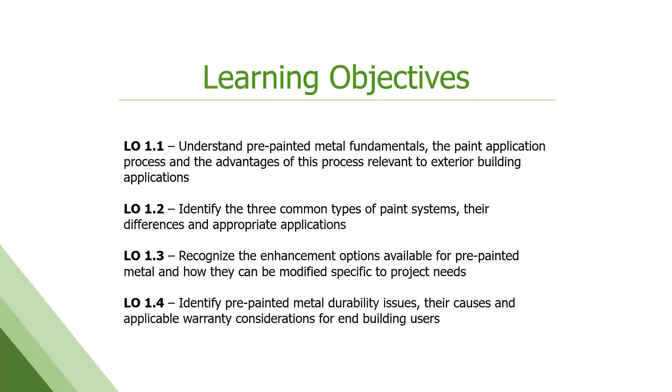So the 4 sections that we've broken this into are understanding pre-painted metal fundamentals and the paint application process. Then we're going to move into the 3 common types of paint that are used for building products. We'll talk about some enhancements and customization that can be done around specific project needs or environments. And then at the end, we'll wrap up with durability, performance, and warranty considerations for this type of product.

So what is pre-painted metal? It's just that. It's giant rolls of steel or aluminum, which have their paint applied in a factory setting, baked on and cured. And then they go on to be formed into panels, pieces, and parts after they've been painted. It's not all the same. There's a lot of considerations, which we're going to go through today.

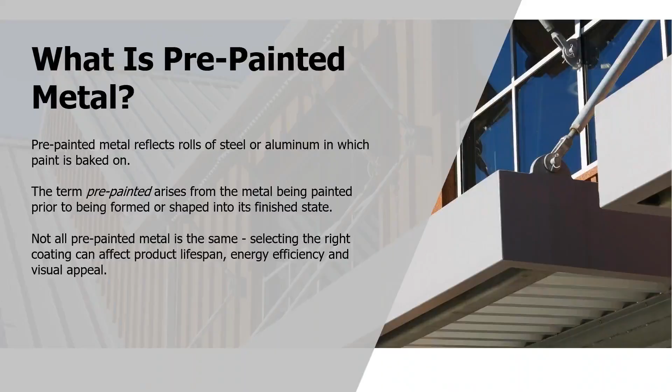So to start, a question for you all. How is paint applied to metal for the majority of building applications? There's really 4 types of paint application that most people know: air spraying, dipping, rolling, and brushing. And the answer is rolling. This is actually a picture of what coil coating or pre-painted metal coating looks like. This is not rollers like we use in our house to roll on house paint. Much larger scale, much faster, much more dynamic, but that is an example of what it looks like.

What we have here is an example of a very standard pre-painted metal line, or coil coating line as they're often referred to. This is from the National Coil Coating Association, the NCCA. It's a continuous process. We actually attach the end of one coil to the next and keep running in a continuous fashion. We clean the coil first. We then usually add a pretreatment and then a primer and then finally the top coat, or the paint that is seen on the finished building. A lot of different coatings are used: backers, primers, and top coats. We're going to get into those later on in more detail.

So the speeds of these lines are quite fast. Typically 100 feet per minute up to 700 feet per minute. I would say that the average coil line in the U.S. runs at about 300 to 500 feet per minute, so very quick.

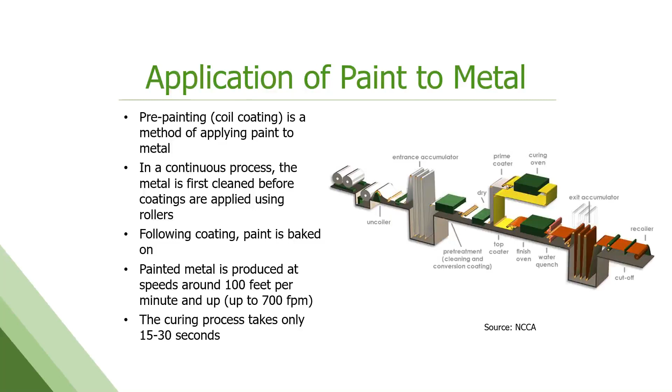So why do we do this? Why coil coating? Why pre-painted metal? There's several advantages to this. The cleaning and the prepping of the metal is very tightly controlled. You get a really good adhesion of the coating to the substrate. It's fast, it's economical, and we're getting very efficient use of the paint.

Typically, the total paint system, including backer and top side, is only about 1.4 mils thick. This is very, very thin compared to most industrial coatings, which are 2 to 5 mils in thickness. Cars are usually 5 to 8 mils in thickness in coating. As a comparison, your average copier paper is actually 2 to 3 times thicker than the paint that we're putting on these substrates.

Michelle? Yes? Michelle, could you move the microphone away from your mouth just a little bit? We're picking up a lot of background noise. That better? That's better. Thank you. Thank you. Sorry about that.

Now, since these coils of steel and aluminum are painted ahead of time, the paint is really important in that it has to be able to survive the fabrication process afterwards. So it's got to be hard, durable, but also very flexible. So there's a lot of science that goes into the paint and the paint formulations. I promise I won't make any of you do any chemistry today, so it's my guarantee to you. But we might use some chemical terms, but no chemistry.

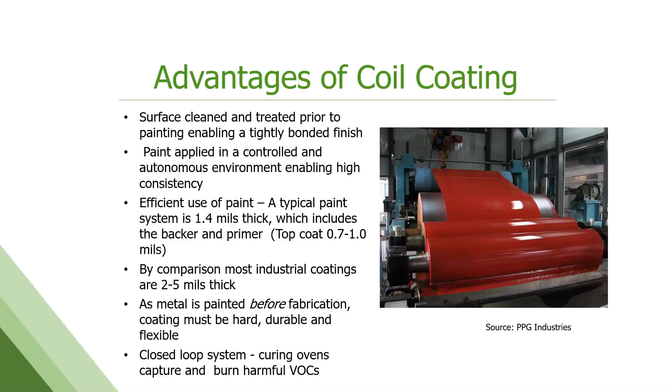Now, although this is a great process, there are a few limitations which warrant some discussion. So it's very rapid once going, very fast and continuous. So there's a lot of setup involved. There's a lot of moving parts, obviously very large equipment, and it's based on efficiencies of scale. So we like to run large orders at once, whole coils, which can restrict the color palette that most end fabricators offer. So doing short custom work is not ideal. It can be done, but it's not preferred.

So for instance, an average paint line holds from start to finish about 2,500 to 3,500 linear feet of metal at a time. So running smaller quantities than that becomes a bit of a challenge in this process.

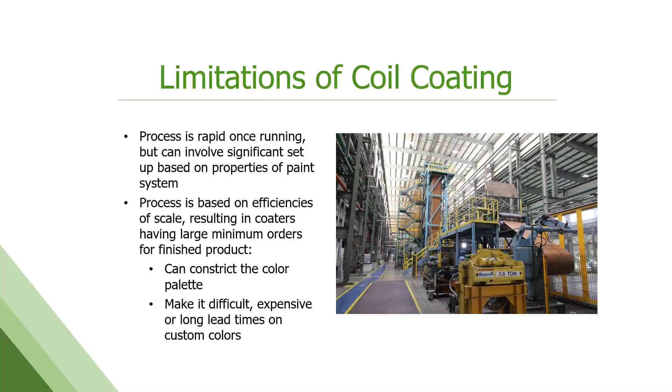Talk about the quality control a little bit. This process, because it is so tightly controlled and is so consistent from run to run and throughout a coil, the quality control is really important. And like we said, these coatings have to withstand a lot once they leave and go to get formed and then get installed on a building. So we run a lot of tests off the line, a T-bend test and a reverse impact test, which simulate forming and shaping of the final product. We want to make sure that the paint adheres like it's supposed to.

We test color consistency. It's very important in the final product, the aesthetics. We look at gloss and film thickness. Film thickness is critical not only for color control, but also warranty performance that we'll discuss later.

And there's some examples there. So failing impact test on the left and a passing on the right. We actually apply a piece of tape to that bump and pull it off quickly to see if the paint comes off or not.

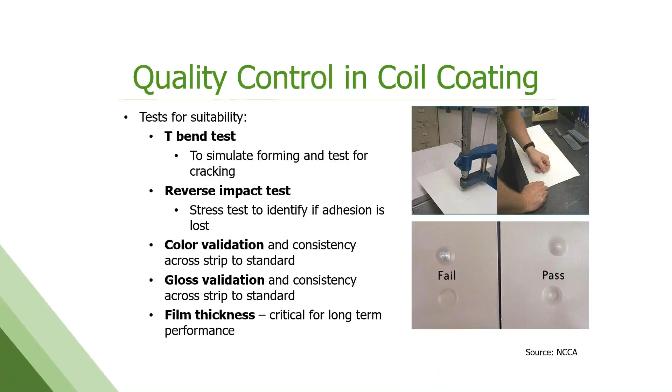While the focus today is going to be on paint, I do want to talk a little bit about the whole system here for reference. So here's a cross-section of what we've got. You've got base steel or aluminum, which is your substrate. If it's steel, there's almost always a metallic coating on top of that for corrosion protection. Then we put down the pre-treatment on both sides. That helps etch the surface and prepare it to take the paint. And then there's a primer that goes on both sides.

The primer does a couple things. It provides good adhesion for the top coat. It also contributes to corrosion protection and formability of the final product. And then, of course, we have the final top coat, which is usually the color coat, the part that's going to be seen in the final fabrication. You can apply clear coats and some other additional coats as well for protection and special appearances.

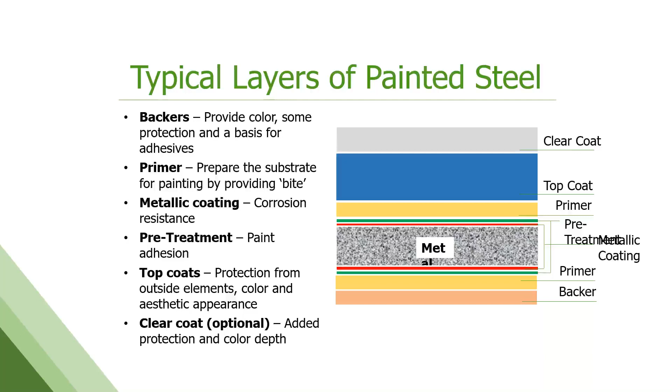So metallic coatings, I want to talk about real quick. There's whole courses just on this. It's a subject unto itself, but the two typical metallic coatings that we see in coated steel are galvanized and aluminum zinc. Galvanized is 100% zinc coating. It has to be added so that the steel doesn't rust. And then the aluminum zinc, 55% aluminum zinc, which is commonly known as Galvalume or Zincalume in the industry.

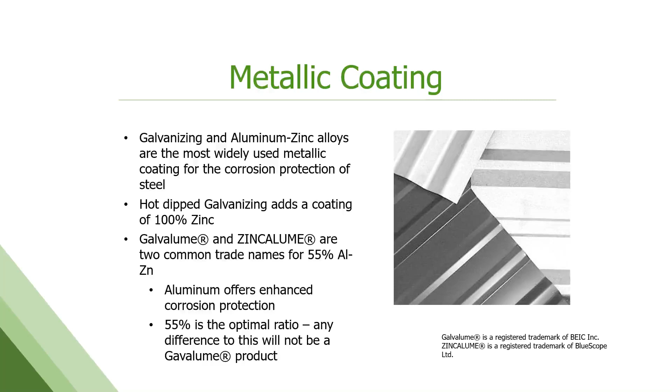The addition of aluminum provides really enhanced corrosion protection. 55% has been determined the optimal ratio for that. The aluminum is inert. The zinc is sacrificial. So the Galvalume product is a licensed product, as is the Zincalume product. If you're calling your product Galvalume or Zincalume, you have to have a license from an organization called the BIEC. Almost all license holders are providing 20 to 25-year corrosion warranties on the substrate for this product, so that separates it from galvanized and some other coated metals that are out there, and it has a warranty to back it up.

And one thing that's important to mention is that there's a lot of aluminum zinc substrate out there, but if it doesn't have the Galvalume name, it's not registered and it's not licensed and may not be warranted. Something to keep in mind.

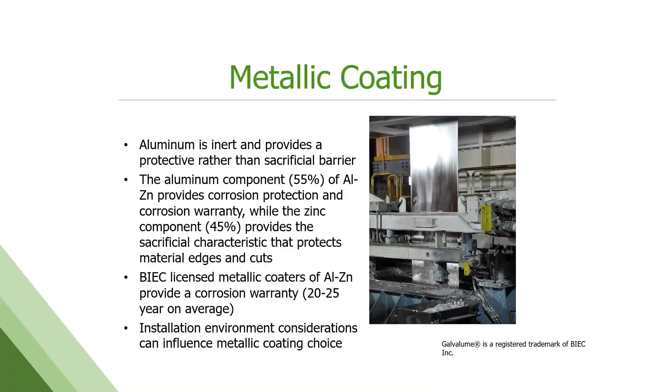So now on to paint, which is the focus of the rest of the time we have here. What is paint? Well, I think most of us have some familiarity with paint and have dealt with it in the past in some form, probably in our houses more than anywhere else. But it's a liquid designed for application to a surface in a thin film that then cures to a solid film. It usually does two things: it's either protecting the surface or creating some kind of desired look or aesthetic. And again, there's many different methods for doing this: brushing, dipping, spraying, vacuum coating, and roll coating.

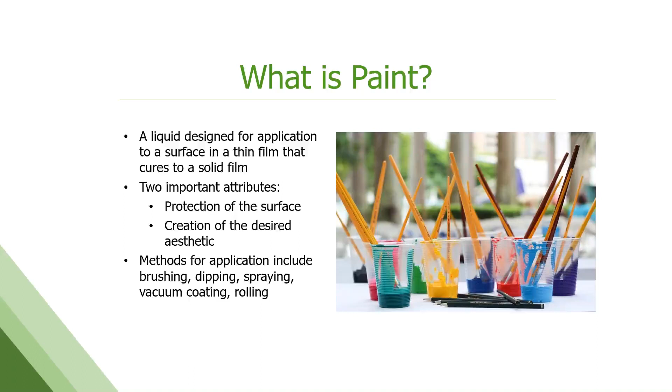There's four primary components of paint that are important that we're going to cover here today. The first being the resin or the polymer. It goes by both names. This is what we call the binder of the paint. It's the backbone of the paint. It really determines the key physical and chemical properties that coating is going to have. It's also called the chemistry of the paint.

Next is pigment. Obviously, pigment's a giant part of what you guys do and how you design and how you want a building to look. So we need that color and those aesthetics to be exactly what we want. The solvents are necessary to keep all the solid resins and pigments in solution and make it suitable for application. And then there's additives that get put in, especially for exterior building use. There are transparent sun protection particles, flow aids, things that help with flexibility. We sometimes call that wonder dust, but they're important.

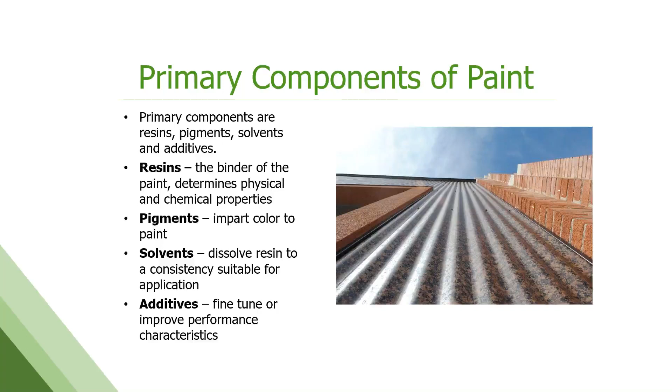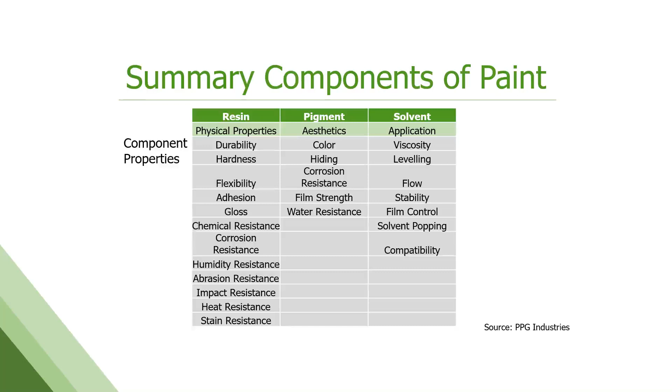So again, this is how each one of these contributes to the overall paint. The resin really plays the biggest part. It's really going to impact durability and performance in the field. The pigments as well a little bit, but more for look. And then solvents are really just for us to be able to handle it in a liquid form until it's finished and cured. This is a breakdown by weight of those four components. You can see that the vast majority is the pigments, the solvents, and the resins, and a little bit of additives.

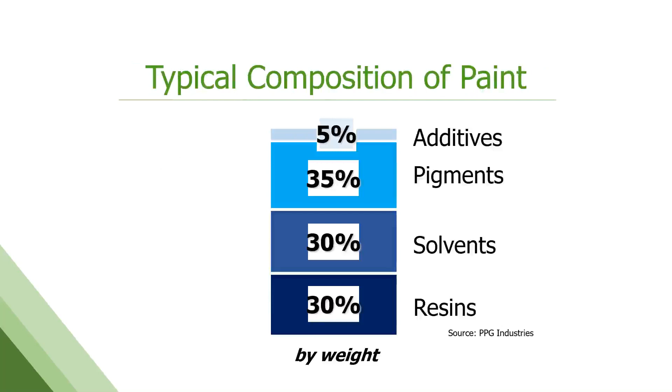So how do we select the right paint, right? There's a million choices out there. You can see that even if you just go to Home Depot and look at house paint, there's 1,000 choices. Quite the same for industrial coatings and coil coatings. There's a lot to take into consideration. You need the right balance of all the ingredients to give you the right properties for the end use. So you get the right adhesion, you get the right color, you get the right gloss. Cost is certainly a big factor, and then warranty and performance.

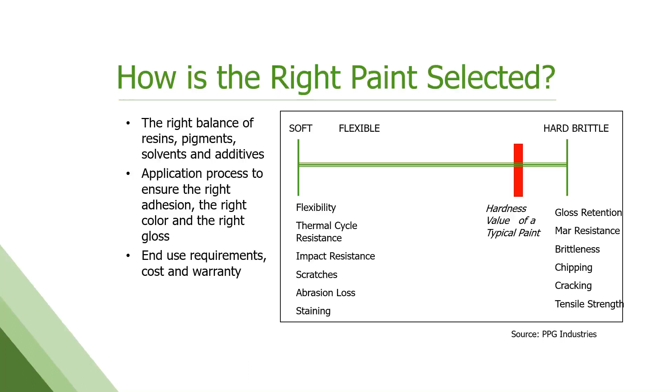So it ranges from very soft, very flexible, to very hard and brittle. And depending on the specific end use that the paint's going to go to, or the coated metal is going to be used in, you sort of have to do some trade-offs to reach a happy medium. The coatings we're talking about today for roofing and walls primarily tend to shift to the harder side. They have to be quite scratch resistant and durable to withstand forming, and then to hold up long-term out in the environment. So you do sacrifice a little bit of flexibility and some other things to do that.

So pigments and color. This is what everyone sees. This is the part that the consumer sees, that you, the architects, see, and the designers see. These are insoluble solid particles, finely dispersed and mixed with the resin or the polymer to get a nice consistent color and look. We use 2 kinds of pigments, organic and inorganic. The inorganic pigments are typically your more earth tones, your duller yellows, reds, greens, browns. These are iron oxides primarily.

Organic pigments are your brighter, truer colors, your reds, your greens, violets. Most of what's in the picture there would be an organic pigment, very vibrant. So organic pigments provide a very nice look, but they tend to be quite a bit less durable than the inorganic pigments and don't hold up well. They fade very easily. So the bulk of the pigmentation used in exterior coatings is inorganic in nature.

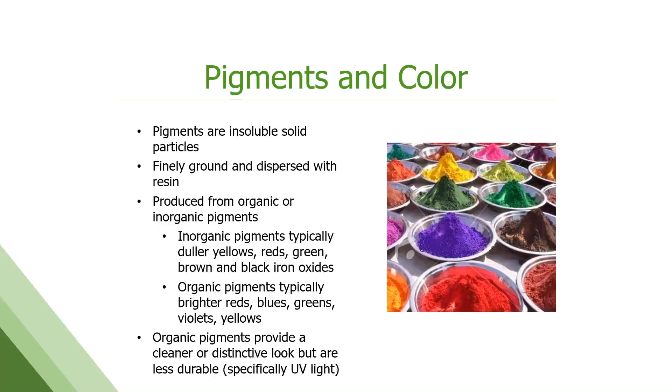So talk about color. As important as color is, color is the eye's perception, obviously, of visible wavelengths. We measure this as an LAB number numerically. The finished product, as it comes off the paint line, is always assessed both visually against a reference standard, but also numerically on a computer, which allows us to get very good consistency and exact color matches from run to run.

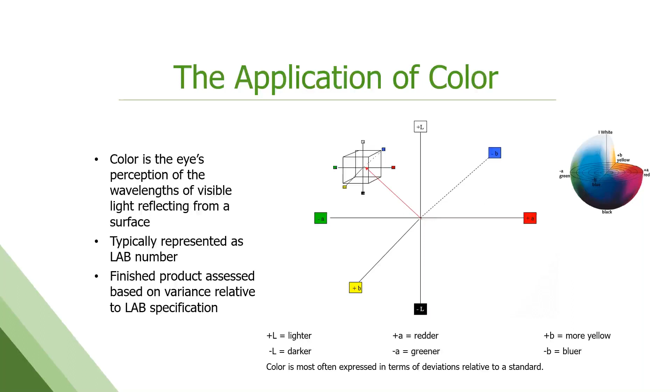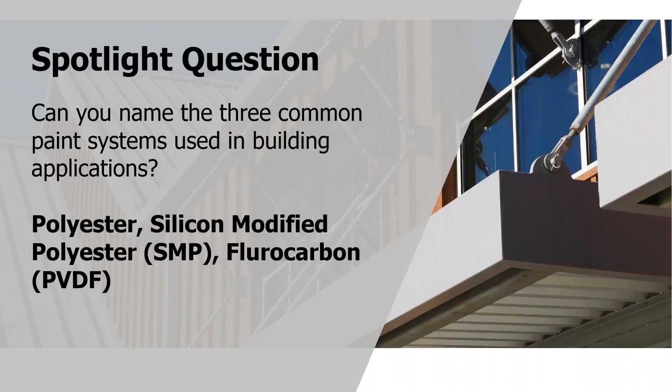So now we're going to move into the 3 common paint types used for exterior buildings. See if any of you can name them. So the 3 are polyester, silicone modified polyesters, and then fluorocarbon or PVDF. Also goes by the name Kynar. Some of you might be more familiar with that. For some reason, we as an industry haven't decided on just one name for that paint system. So we like to create a little bit of confusion for everyone.

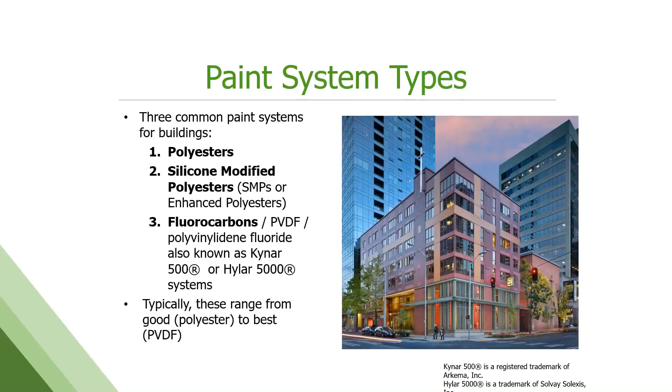These are listed good to best as far as performance and warranty out in the field. So polyesters are sort of the workhorse of the paint world, and then silicone modified polyesters are sort of a step up, been enhanced a bit, and then the fluorocarbons, PVDF, there's all the names, Kynar 500, Hylar 5000, that's usually spec for architectural projects. You move up.

So polyesters, like I said, really are the workhorses. They can be formulated in a lot of different ways. They're very cost effective. They tend to be very flexible. They can have a wide range of hardness, wide range of color and gloss options, and they're very versatile. But their performance long-term is maybe not ideal for certain applications.

So we see polyesters a lot in gutters, downspouts, agricultural, light commercial. It does get used in the appliance world. Almost all interior pre-painted products are polyesters. Door frames, window sills, things of that nature will be a polyester.

And I always like to point out to people that if you want to understand the diversity of a polyester, and that is a chemistry type, that term, think about the polyester clothing you wear versus a polyester paint on a building. Same chemistry family, same basic chemical reactions taking place, but two very, very different outcomes in the end product. So wide gamut there.

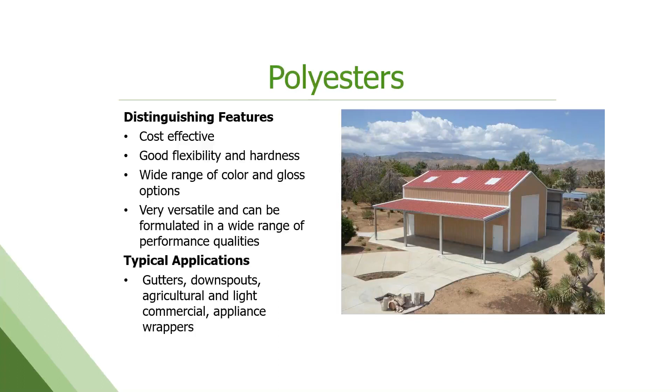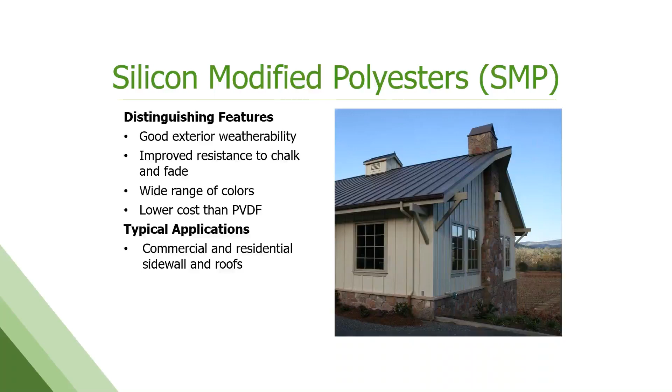Silicone modified polyesters are usually referred to as SMPs by their initials. So these are polyesters that have had a silicone intermediate reacted into the resin. This addition of silicone helps with durability and fade for exterior uses. So you get really good resistance to chalk and fade. Again, you still have a wide range of colors and glosses available. But it is a little bit lower cost than the PVDF Kynar systems are. And we see SMPs being used predominantly in light commercial and residential applications for roofing and sidewall.

And then we get to the fluorocarbons, the PVDF. This is sort of the Cadillac of pre-painted systems here. They go by different names, but they all reflect the exact same chemistry. PVDF is actually a very close cousin. It's one atom removed from Teflon. Most people can wrap their head around Teflon and how durable a product that is and its reputation. So this is very, very similar in nature.

It has exceptional chalk and fade resistance. It does well in aggressive environments, great chemical resistance, excellent formability. And we see this in almost all big-scale commercial and architectural applications.

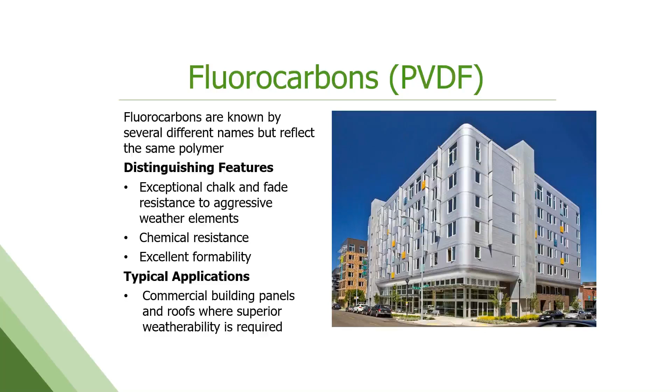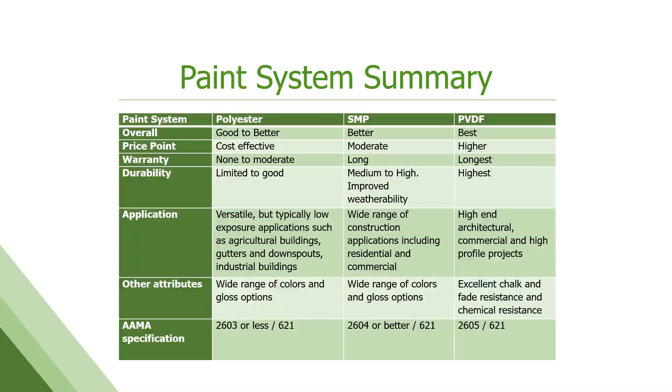So, you know, how do you decide on paint, right? We've just gone over all these options. So not all polyester systems are the same. Wide range there, so it really depends on the end use. The differential these days in performance between a high-end polyester and a silicone-modified polyester can be quite marginal. The high-end polyesters have gotten very, very good over the years, and that has to do with pigmentation and resin chemistry having improved. But the PVDF, so the Kynar, is still really the best for exterior durability and warranty.

Reminder that the Kynar 500 and the Hylar 5000 brand of PVDF is a trade name. The paint companies who make these products have to be licensed to use Kynar or Hylar and to call it by that name. It has to make up 70% of the overall resin composition, and that is tightly monitored.

A word of caution: the Kynar and Hylar licenses are issued to a company for a specific geographic region. So just because someone has a Kynar license, say in China, to make Kynar paint, doesn't mean they can sell it here in the U.S. as Kynar, and vice versa. So sometimes we run into that certain offshore suppliers don't necessarily have the licensing for the United States.

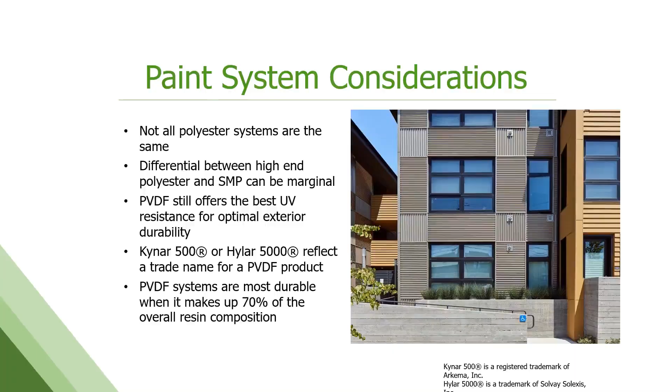So we haven't broken for questions, and that's my fault. Do we want to take a quick pause? I do have a couple of questions. Thanks, Michelle. And a couple of people are asking if you could just move the mic a little bit farther away. It's picking up some of the breath. Try and dial this in correctly.

All right. So we have a listener who's asking about Galvalume, and her understanding is Galvalume has a plastic coating on it. Is it possible to get it without the coating? The reason she's asking is because they harvest rainwater from their roofs, and they prefer to avoid having any plastics get into the water. So I think probably what she's referring to is the clear-coated Galvalume. Most Galvalume, it's called bare, but it's really not. It has a very thin, clear resin applied to it. It's not plastic per se, but it is a coating.

Yes, you can purchase it without, but the downside to that is it fingerprints really bad, and it may be difficult to roll form into the finished part. However, there are those clear resins that are safe for water catchment and runoff, and they get used for that all the time. So there are environmentally friendly options for that clear coating that most suppliers have access to. So that's just something that the architect would have to specify during the specification process. Want to have a discussion. Yes, absolutely.

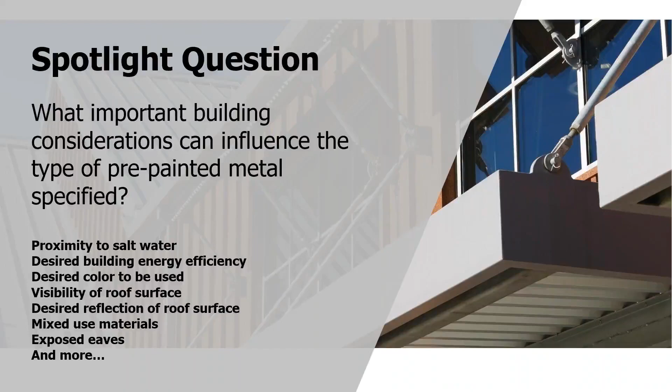And then the mix of materials. What other materials might come in contact or be used on this building that has pre-painted metal on it? So it's a wide variety. We're certainly not going to be able to cover them all, but we wanted to cover the more common ones that come up. The first would be mica and metallic pigments. These are really popular in the architectural world, right? So you get that sparkle, shiny effect, the silvers, the champagnes, the golds. And there's some cautions that come with those. They get used a lot, but they need some special handling.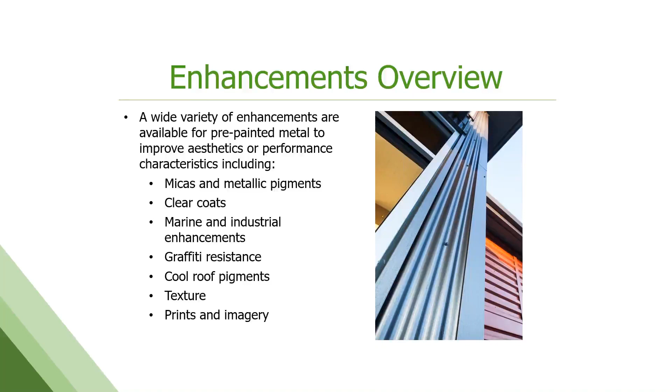There's clear coats available. The clear coats can offer everything from extra protection in an aggressive environment to enhanced abrasion performance if you're in a place where there's a lot of blowing sand, for example, out in the desert. There's marine and industrial enhancements. Marine is pretty self-explanatory. Industrial would be like mining operations, chemical processing plants, things of that nature, where the building's going to be exposed to some kind of bad fallout or fumes. Graffiti resistance, this is a big one. There are coatings out there that not only resist graffiti, but are easier to clean. Cool roof, that's energy efficiency. Textures, and then prints and patterns. All things that can be done on pre-painted metal.

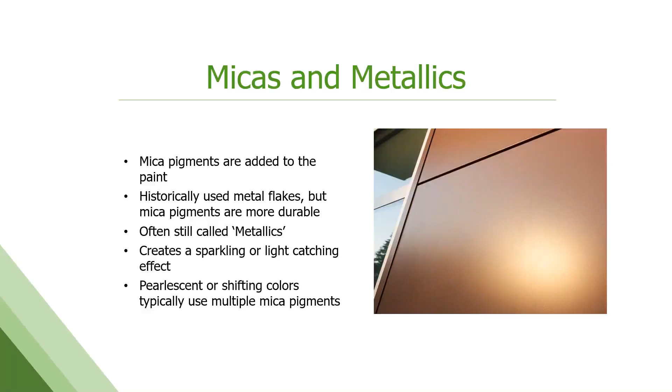So the mica pigments, which are added to the paint, are sort of pearlescent and shiny in nature. We used to have to use metal flakes, actual true metallic flakes, to get this look, but they had performance issues, and everyone pretty much switched to micas. But they're still called metallics in the industry, so those terms are used interchangeably. You can get shifting colors too. So you've probably seen there's cars now being painted. There's a few buildings out there that have a color shift as you walk around it and the viewing angle changes. That's almost always done with a mica type pigment.

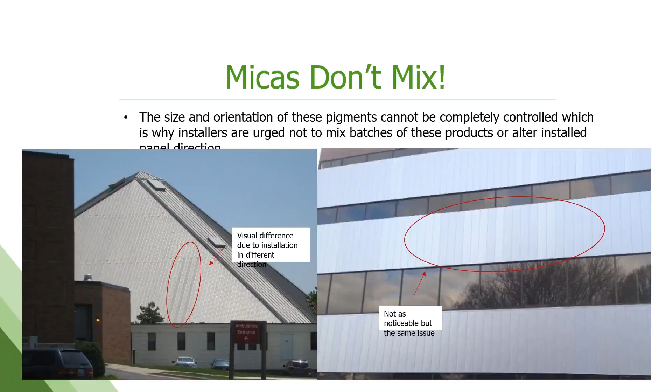But here's the do not do part when it comes to micas. So the size and orientation of these pigments cannot be completely controlled in the coil coating process, the way that they lay out. So you can't mix batches, and for one job, it all needs to run at the same time because it's directional. And you can see some examples here. The building on the left, that roof was actually all the same batch of material, but they swapped some panels 180, and you get that directional difference in look. And same on the right. It's not as noticeable, but they installed some of those panels backwards, as it were, and you can see a shift in color. So that's really on the installers to make sure that they keep track of that well.

And then we've got extreme environments. This is probably the specialties that come up the most for us in the pre-painted metal world, and this would be marine environments, industrial environments, where it's a corrosive air atmosphere, or they're spraying salt water of some sort that might come in contact with the building. So these are addressed by boosting up the primer that's underneath there. So there are special high build primers with extra corrosion protection.

Then you put your regular top coat down, but then they almost always have a clear coat on top as well to help give them that extra layer of corrosion protection long term. So it's typically a 3 or 4 coat system, which means it has to go back through the paint line twice. So there's a little bit of added cost and time to get those done. But it is a warrantable finish. It may not be as long as a, quote, normal location, but there are warranties available for that.

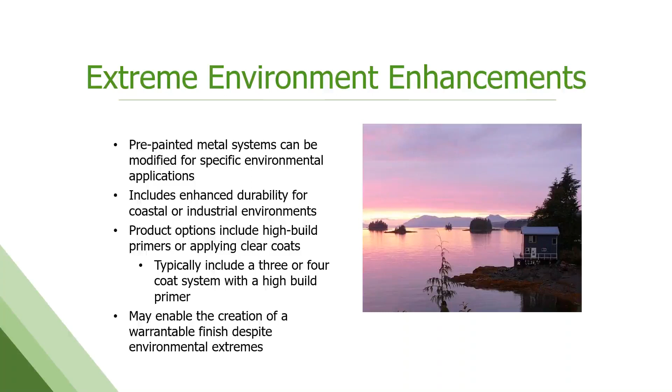So the clear coats and graffiti resistance, these are quite fascinating. So the clear coat goes on top to provide the added protection, either to help with UV fade resistance, or corrosion, but also to help with graffiti, right? So some of the new clears that are out there, it's really hard to get any other coating to even stick to them in the first place. And then if something does stick, they're very easy to clean and get that graffiti off.

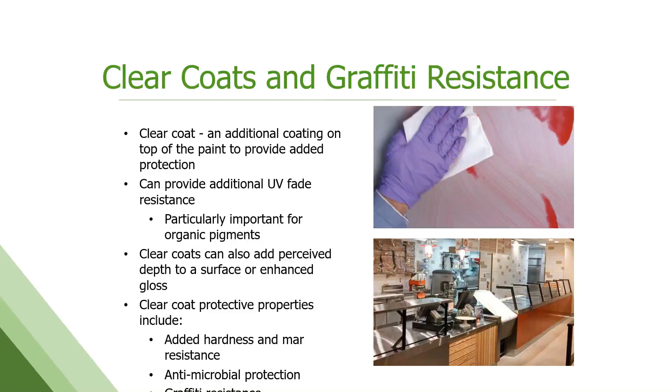Word of caution on clears, not too big of a deal, but you will get a slight shift in the visual color with and without a clear. It tends to yellow it just a tad. This will be more visible on a lighter color than a darker color. But, you know, if you find yourself working on a job where that needs a clear coat, make sure you ask for color samples with the clear coat so you know exactly what it's going to look like.

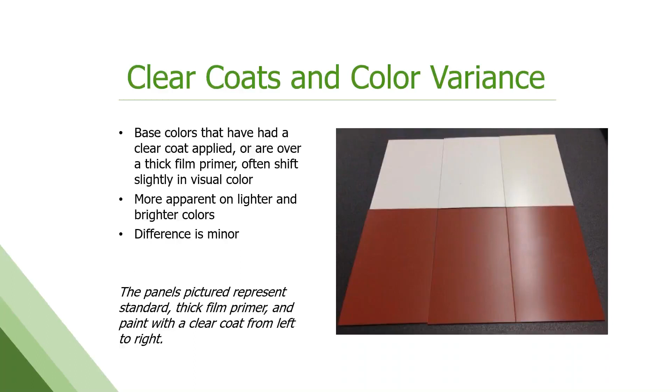So now we move on to backers. This is the paint that gets applied on the backside of the finished product. It's often sort of overlooked and not really considered, but it can be important. It's usually an off-white or a light tan color. It is, you know, applied consistently, so it looks the same. Open, pre-engineered metal buildings, you can see the backside of the panel, so it needs to look decent and be consistent. Eaves and overhangs that could be exposed, you want that backside to look good.

We also use these backers for adhesive properties, so foam insulated panels. That backer has to be able to take that foam insulation and adhere to it, so those are formulated specially for that end use. It also helps with corrosion protection, and when the coil has been painted and rewrapped, that backer helps limit any abrasion or scratching that might occur within the coil while it's being handled and transported.

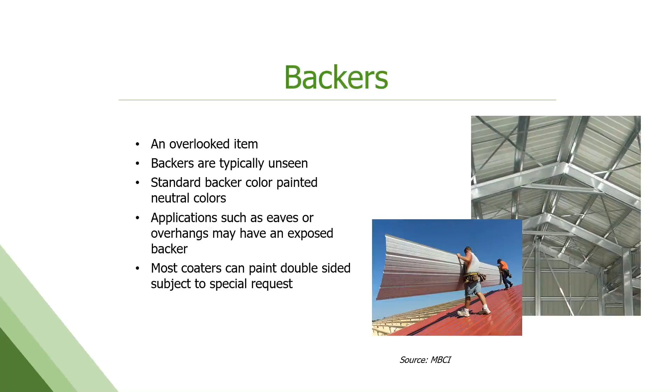So now on to cool colors, a subject we spent a lot of time on, as Paul mentioned in the introduction. So cool colors came on the market back in sort of late 90s, early 2000s. So the coolness of these systems comes from the pigmentation. So the pigments were altered chemically and physically to reflect in the infrared range of the light spectrum, which is where most of the heat comes from. The near IR region is what generates heat on a surface.

They were able to do this without dramatically altering the visual color of those pigments. So they were able to take dark browns and blacks and greens and blues and keep them in the same visual color space, but alter them so that they reflect this near IR region. It's become sort of the standard anymore. Just about every standard coil coating pre-painted metal paint uses cool pigmentation now. You guys are probably all familiar, it's in the specs, especially out here on the West Coast and the Southwest. It's a requirement on painted metal.

And it truly does help minimize heat buildup and reduces cooling costs in hot climates, and also the outside temperature of the building. One of the first feedbacks we got when the product was launched is that the installers were quite happy that while the panels still get quite hot in the sun while they're installing them, it wasn't quite as intense as it was with the old systems.

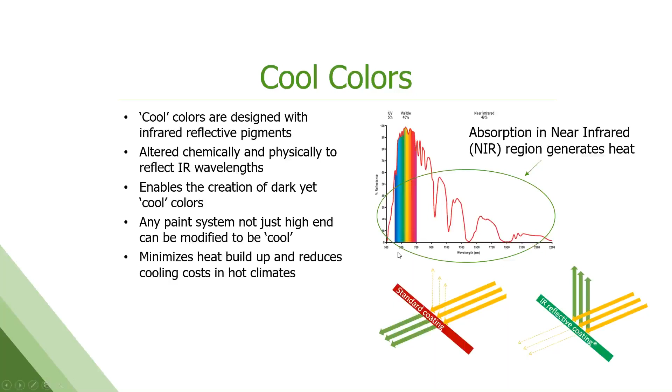So there's several terms that come up in the cool pigment world, and you will see these in a lot of the specs and regulations. The first one is solar reflectance. It's the amount of solar radiation reflected off the surface. It's expressed as a percentage usually.

Emissivity is the amount of heat a surface can dissipate away from itself. So, okay, it's gotten hot, but how quickly can it try to cool itself off? That's important. And then the SRI, or Solar Reflectance Index. This is a calculation of the first two values with some wind airflow constants mixed in. It's a very long calculation.

The Cool Roof Rating Council is sort of the go-to third-party verifier for these properties, and not just for pre-painted metal, but any roofing or wall type of coating or substrate that needs to be listed gets checked by them.

One really nice thing about pre-painted metal, because it is so incredibly durable and our colors don't fade or change over long periods of time, is that this initial SRI that it might have is going to hold for years and years and years, whereas other types of roofing products especially tend to degrade very quickly in the first few years, and the benefit that you're getting drops off right away. But with pre-painted metal, it really doesn't. So the 3-year aged value is what most agencies list.

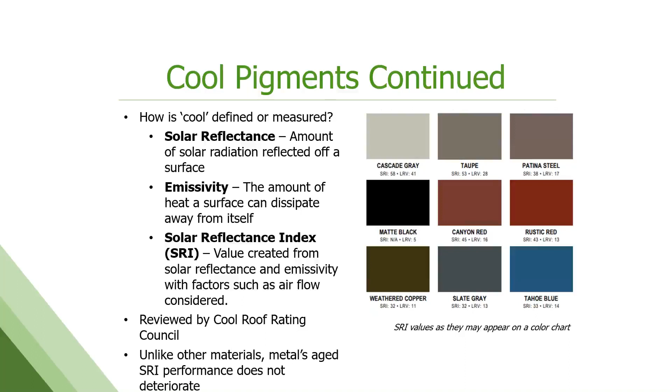Steep slope, you have a little bit more room to work with. Initial SRI of 39 is going to give you some medium colors. It used to be 29 for LEED. When they raised it to 39, some of the darker browns and grays sort of dropped off as being usable at this point. But I can assure you that the pigment companies and paint companies are working on this diligently, trying to get those darker colors up in SRI value.

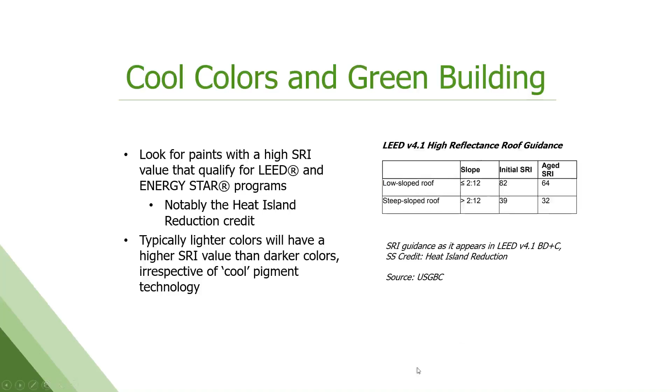So the other reflectance value that comes up a lot is light reflectance. Light reflectance and solar reflectance do get confused with one another quite a bit, but they're very, very different. Solar reflectance is all about that near infrared region, not visible light. Light reflectance value, LRV, is about the visible light that you see off of the surface. We typically call it glare, right?

So metal, even painted sometimes, can be quite shiny, so you get a lot of glare and light reflection off of it. It is expressed as a percentage from 0 to 100. Lighter colors will have a higher value than dark colors on average. But there are ways to adjust this, because glare and shininess can be objectionable on a final installation. So you can play with texture, and there's ways to get a more matte finish by putting additives in the paint.

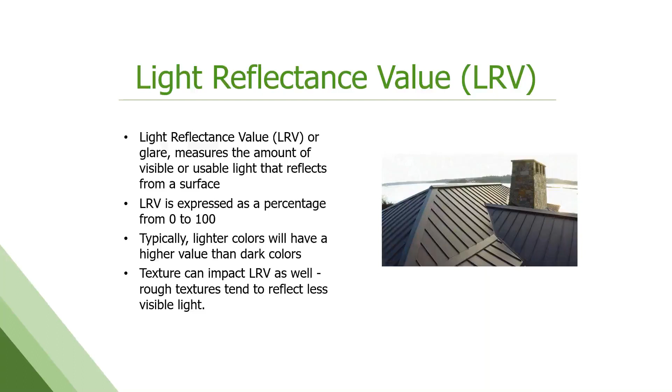So at this point in time, most of the standard paint systems for exterior building products are probably in the 10 to 20 range for gloss and sheen. We've seen that number come down over the years for a couple of reasons. One, as it gets used more in residential, your neighbors don't want to be blinded by your roof. And it's an issue around airports and military bases too for aircraft. They don't want to be blinded by a building on the ground.

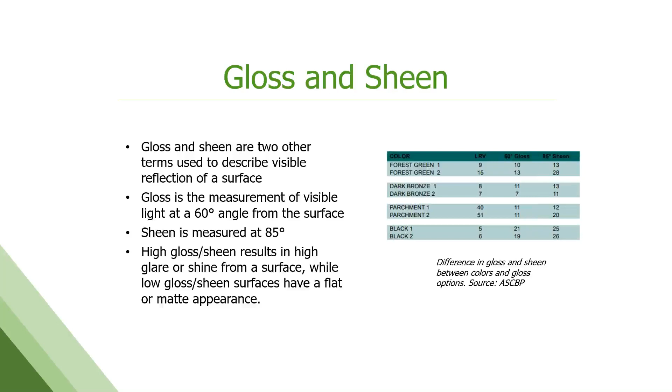But if you get the gloss and sheen down to 8 or less, which is quite low, you get a pretty matte finish with not much light reflectance on it.

So the textures that are used, and these are gaining in popularity, are done a couple of different ways. It could be the actual paint chemistry itself through a chemical reaction, or an actual particle that's added to the paint to give it some texture. Sometimes you can feel the texture; it's that thick. Sometimes it's like a micro texture within the paint.

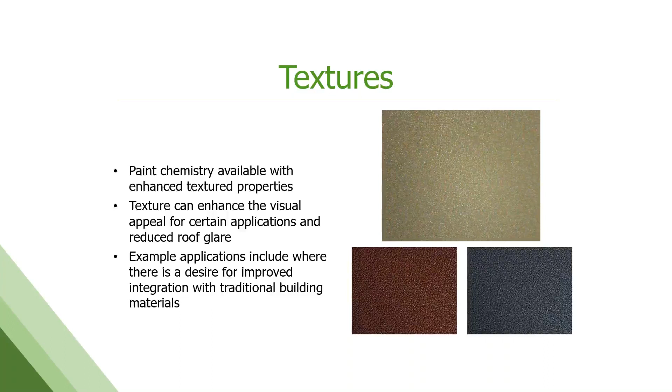So then that takes us to other types of visual enhancements, and these two have become quite popular in recent years, and that is printing or print patterns. They typically mimic some other natural product like granite or a natural patina look; maybe a brushed look on stainless can be mimicked with paint. So it's the same paint systems that are used for a solid color, but you have special printing rolls that have been etched or cut to give you the pattern that you want. Wood grain is another one that we see a lot out there that gets used.

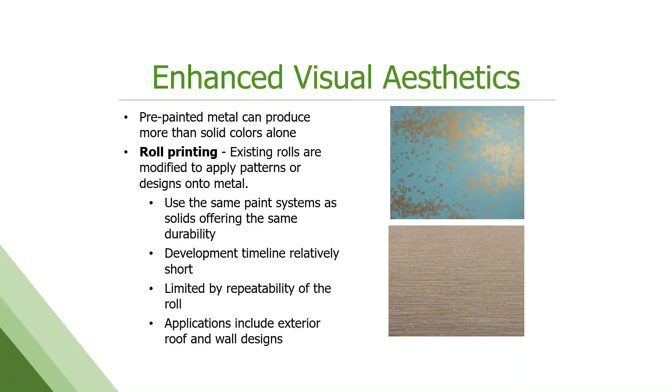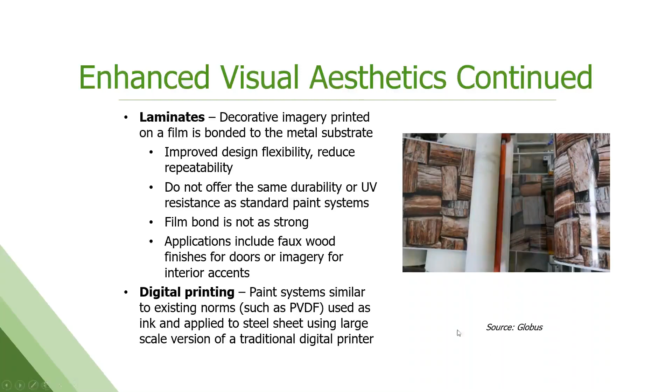And then there's a new way of printing imagery, digital printing. It's like regular digital printing on paper, only scaled up for these coil lines. And so there are high-end inks and paints being used. It's like a giant printer with all the different dyes, and you can program in the image that you want, and it'll print it on the metal surface. But I went a slide too far. It's actually a fairly new process, and there's only 1 or 2 lines currently in the world trialing it, but it's sort of exciting to see how that develops.

And I'll stop again. Any questions on that section on aesthetics and enhancements? Hi, Michelle. We have a couple of questions that have come in. Okay. One of them is about SRI numbers and what range is kind of the industry standard, and then the listener's asking what rating is LEED or better. So I don't know that there's an industry standard per se. I think most paint formulators at this point are targeting an SRI of 25 or better to consider it cool. And that comes from the original Energy Star specs from many years ago now, where 25 was sort of the starting point for cool. But the new version of LEED for sloped roofing is a 39 SRI, so they have bumped it up. So for LEED purposes, to get that credit on a steep slope, it needs to have an SRI of 39. Great. Thanks.

And a second question here about low gloss. Does it have a greater chance of retaining dirt and dust? Not typically. It's an excellent question, and it comes up a lot, and it was a very big concern when they were first developed. But no, dirt pickup for most of the systems that I've got experience with is not a real concern. And actually, the paint companies take the time and spend the money to put panels out in a site in Arizona that's very dusty and windy, and they actually do dirt collection assessments over time. And there doesn't seem to be any significant difference between the textures and a flat finish for the most part. Great, thanks. That's it for right now.

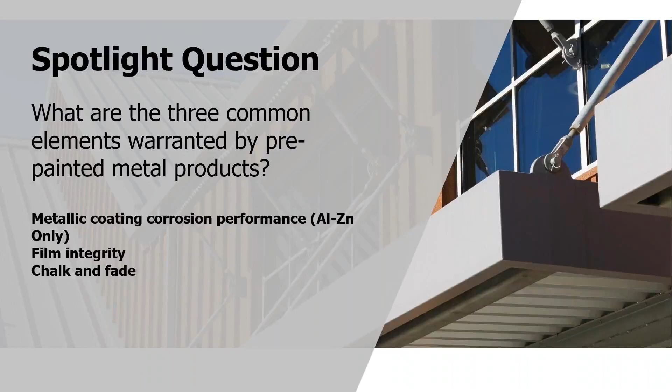Let's talk about durability first and what that means. So the pre-painted metal warranties right now run the gamut from nothing, 5 years and up. I mean, we're seeing 40, even 50-year warranties now for high-end painted systems. It's usually for excessive chalking, excessive color fade, and then delamination of the top coat or primer, which is what film integrity means.

So why would there be failure, right? Why would there be chalking or fade or delaminations? And there's a lot of root causes for that. It can be improper application or installation of the building itself. It could be a bad paint formula.

It could be an issue that the coater, the coil coater had. Maybe they didn't get the right film. Maybe they didn't cure it correctly. And there could be environmental conditions as well. Is it corrosive? Is something happening at the site that's affecting this paint in a negative way?

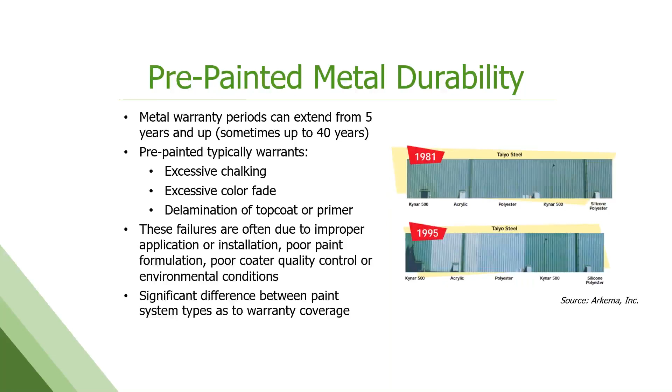So excessive chalking, it's just what it sounds like. It's when a painted surface gets white and chalky and there's this white powder on it that you can actually usually wipe off with your hand or a rag. What's occurring there is that the resin particle or the polymer backbone is being broken down by UV exposure into little short segments and then can come off the surface, bringing the pigment with it, which is why you get a lightening or a whitening effect.

This used to be an issue, but I would say in the last 20, 25 years, even the polyesters, the lower end polyesters, the technology and the pigmentation has gotten so good that we rarely see excessive chalking in the field anymore. It just doesn't happen very often. But the warranties, the high-end warranties, are typically 20 years or more for this defect.

There is a rating in ASTM test that dictates what excessive chalking is. The higher the number, the better in this case. So a 10 or a 9 on the scale means that there's really no chalking occurring at all.

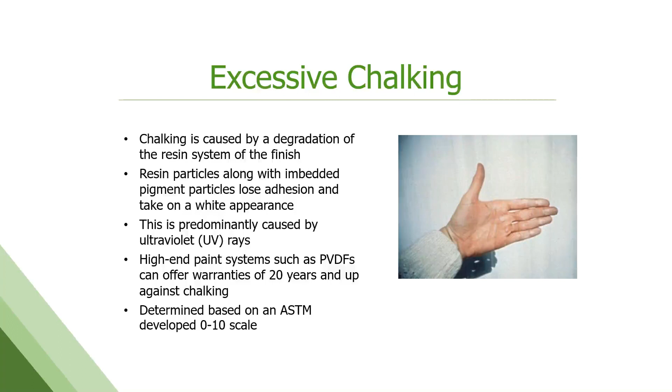Color fade is probably the biggest one and probably the most important one in the exterior building world, right? We don't want it to fade, or we don't want it to fade too much over time. So fading, of course, is when UV degrades the pigments itself. Color change is measured by a delta E value, a numerical value that we use an instrument to measure.

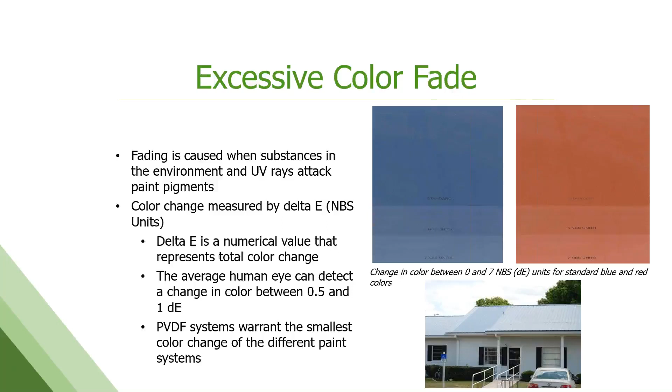And the last one is film integrity or delamination. This one we do see, it's a tough one to determine root cause. This can be either the top coat coming off and away from the primer, or the entire paint system coming off the metal substrate for some reason. It's usually a bubbling or peeling. Sometimes you get little chips and cracks that show up. And again, a lot of reasons for this, but the most common would be low film.

So that would be the coater not having applied the right amount of paint to the surface. An incorrect pre-treatment, so you don't get a good bond of the paint to the substrate. Inadequate curing of the paint system. Some kind of incompatibility between the top coat and the primer. We've seen that where the, quote, wrong primer was used under a top coat, so there's not a good bond.

The one we see the most of is mechanical damage. And in our world, mechanical damage means any kind of exterior force that has occurred on the surface to cause an opening in the painted surface that then leads to delamination. So scratching during installation or afterwards, fasteners maybe not being done right that tear through the surface, and then now there's a little opening where moisture and ice over time or whatever can get in there and cause that paint to start coming off.

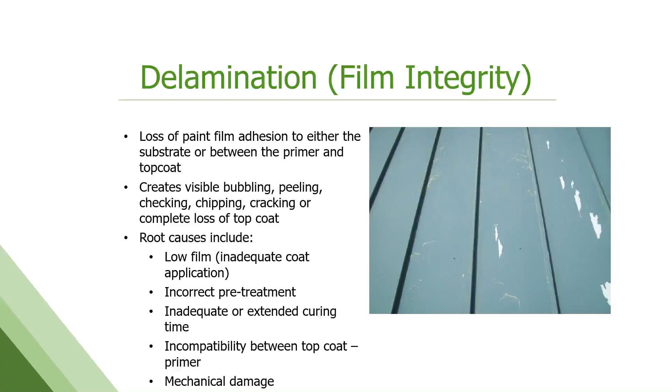My favorite example of this is a field warranty claim I worked several years ago where in Lake Tahoe at the high school, they were complaining because there was all these scratches and paint coming off the roof. So we went up there and looked at it, and in the process of looking at it, we were informed that in the wintertime, the students snowboard off the roof of that high school with their snowboards. So that certainly would explain why there would be scratches in the painted surface.

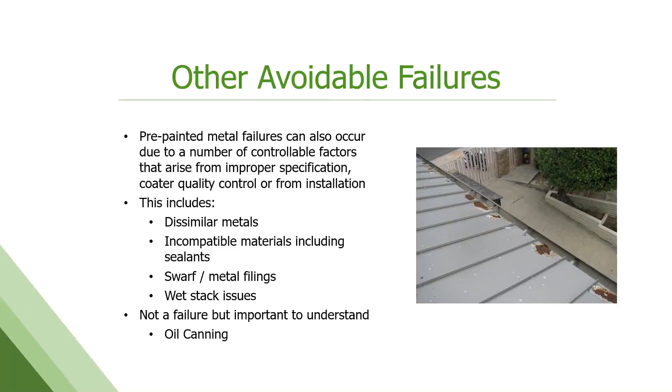So those are sort of the things that are covered in warranty, but there are other types of failures that occur that aren't necessarily a warrantable failure, but issues that we see out in the field that we need to be cautious of. And this would be dissimilar metals or incompatible materials being used with the pre-painted panels, swarf or metal filings that are left and not cleaned up at the end of a job, and then storage corrosion. So either in coil form or the panels being stored in a wet or hot environment before they go up on a building can lead to corrosion and issues. And then there's also oil canning, which is a shape issue that can occur.

So dissimilar metals, probably the biggest one we see is near the ocean, which is considered a corrosive environment. So there's salt-laden air or fog or rain. And it's all about the galvanic scale. So the further apart two metals are on the galvanic scale, the more prone they are to have this type of corrosion in contact. And what we see a lot is stainless steel components being used with the zincalume or galvalume substrate on buildings.

So this particular case here, this house was about 200 feet off the surf break in La Jolla, and they recessed the stainless steel light canisters through the painted galvalume panels. And you can see that ring of corrosion that is occurring around there. Now, if this weren't next to the ocean, it probably wouldn't be a problem, but since it was right on the ocean, it became a pretty big issue.

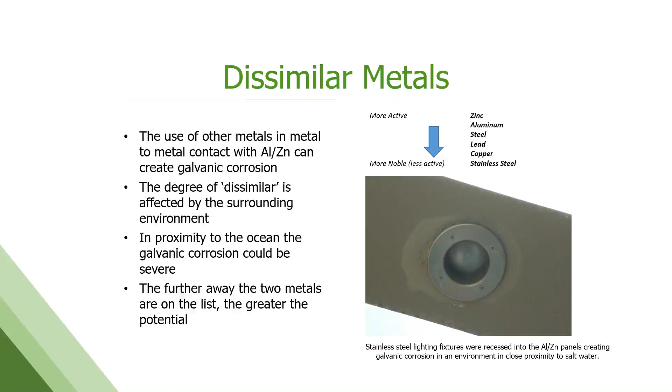We also have concerns with concrete. So the moisture that's held in concrete up against galvalume can be a problem. There needs to be a barrier between the two so that the moisture can't work its way into the galvalume panel and attack the aluminum component that's in there. And then chemically treated wood can be a problem, especially because it's often treated with copper compounds, and copper leaching out of the wood onto the painted metal will cause premature corrosion.

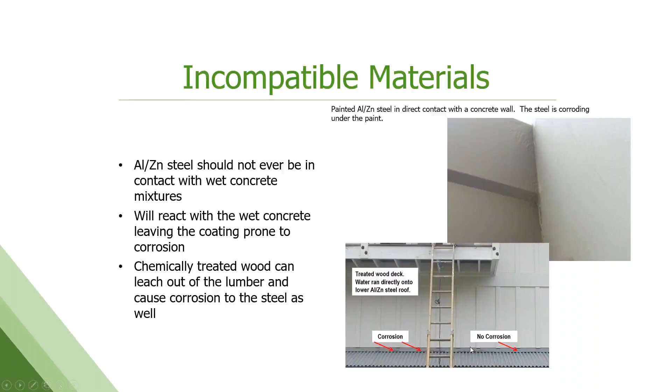So the example at the top here is concrete. The wall on the right is concrete, and then the galvalume panels on the left. You can see the corrosion blooming out from those contact points. They did not use a water barrier between them. And then this is a chemically treated deck, and where the water was running off the deck, we were getting corrosion down below on the panels at the next level. But as soon as you got away from that deck, it was fine.

Swarf, metal filings. This is an installation issue. So these are little, when they're drilling and cutting on a site, putting fasteners in, you get little shards of metal left over. If they're not cleaned off the surface, those start to rust. But the complaint that comes in is, oh, my metal panels are rusting. Well, the metal panels aren't rusting. It's what got left on the surface that's rusting. And it's very, very hard to clean off after the fact.

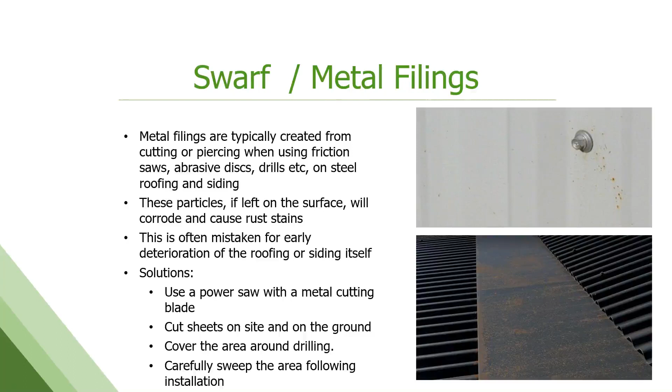So during installation, they need to be very diligent about sweeping and cleaning these up as they go before they start to rust and leave these ugly rust stains on the painted surface. So we have all kinds of recommendations around the type of power saws and blades that should be used. It's best to cut on the ground if you can. Cover the area around any drilling and cutting if possible, and then clean up routinely.

And then wet stack or storage corrosion. So this is when the panels are packed tightly together and don't have a lot of airflow and moisture builds up between them. That moisture actually penetrates through the painted surface to the substrate and will start the rusting or corrosion process because it's trapped. And it presents as these little tiny micro blisters of the painted surface. So there's a whole bunch of technical bulletins on how best to store material before it gets put up on a building so that this doesn't happen.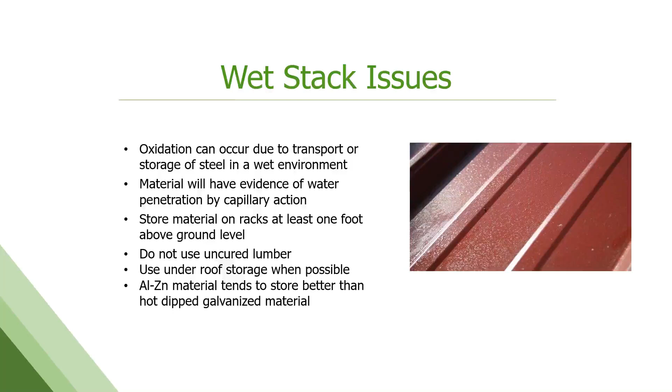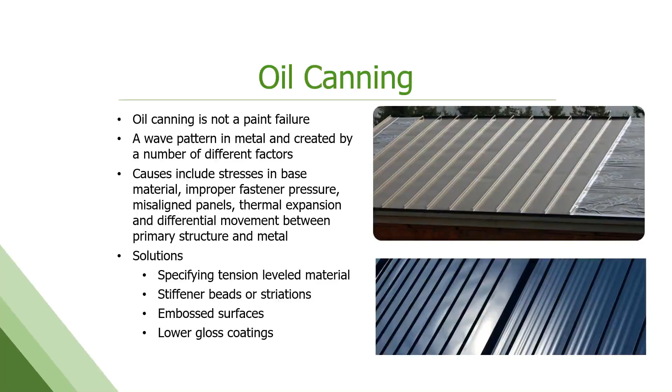So how do we avoid these types of failures? Using the right paint and having the right paint specification for the environment and the end use is very important. You want to use a reputable coil coater with really good QC practices. You don't want to mix batches or types of products. A good manufacturer who's roll forming good panels and packaging them appropriately to go to the job site. And then an installer who's familiar with working with metal and how to cut it, how to handle it.

And then cleaning. Most of the warranties do have a cleaning and maintenance schedule built into them. Again, I like to use car analogies: most people don't keep their car their entire life and not ever wash it, right? It would be a disaster. Same with roofing and siding. It should be washed off periodically.

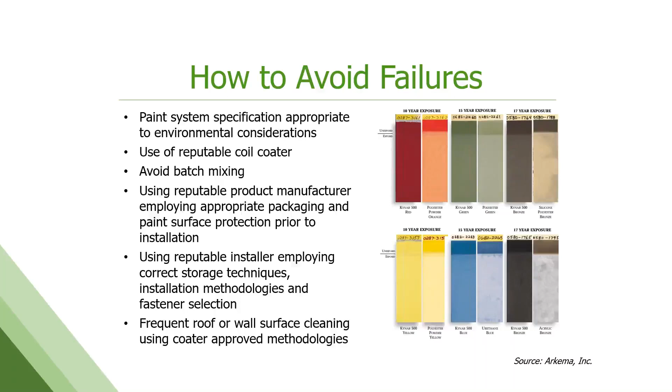So what does a coating warranty look like? We have some examples here. Everyone's sort of got their own format. But again, you really want to see what are they warranting, right? So usually there's some duration at the top. It's 30 years, it's 20 years, it's 25 years. Okay, well, it's great, but what's being warranted for that duration? What does that mean? How long is the film integrity? What's the color fade delta E that's going to be allowed? What's the chalk rating that's going to be allowed over time? And sometimes the initial duration at the top, 40-year warranty, only applies to the film integrity, and it's reduced for the fade and chalking. So you really do need to read through the whole warranty, which a lot of people don't.

And then there's a lot of other things, right? Like with any product warranty, if you've ever taken the time to read one, about 10% of the document is what's warranted, and then the other 90% is all the exclusions and things that will void the warranty. So it's always good to read through those as well to see what's not covered long term.

But I always like to point out here that pre-painted metal, aluminum and steel for the outside of buildings, typically with a PVDF coating, is going to have anywhere from a 20 to 40-year warranty on it. And we've already talked about what an incredibly thin amount of paint that is, which is pretty remarkable that it's expected to last as long as it does. By comparison, the typical paint warranty on an automobile, and automotive coatings are often held up as the pinnacle of paint. Keep in mind, it's 5 times the thickness.

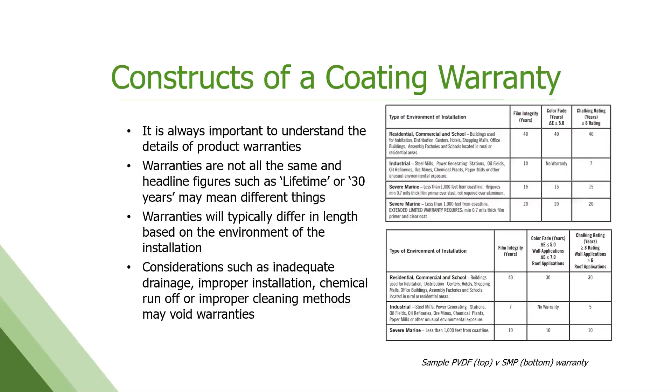So again, this is checking to see what you want in the warranty, what's being warranted. And then also the other thing to stress is what's the remedy, right? If there is a failure, what's the manufacturer going to do to fix it? And that can vary quite a bit between suppliers as well.

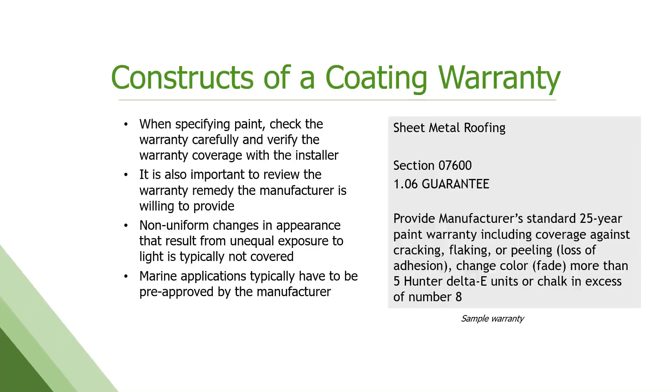Marine applications, severe environmental applications or sites typically have to have a pre-approved warranty. It's not going to be your standard warranty, and most suppliers have a process for that to go through.

So I think I'm only a couple minutes over. We're at the end. We've covered a lot of information. I'm not going to read back through it all, but we did cover a lot as far as what is paint and the specifics of it and the warranty. So are there any questions?

Thanks, Michelle. Yeah, there are a couple of questions. I recognize we're over, so I'm gonna take one of these questions, which is asking a practical application of some of this, and maybe ask you to respond to it and put that into the larger context of the course. So what the listener's asking is, they have to replace some metal pan stairs with new metal stairs in covered but open stair towers. Stair companies are offering to deliver products primed, galvanized, or powder-coated finish. Can you say what's the best option there and why? And I think maybe that'll wrap up a lot of things you talked about today.

Yeah, so stairs would be a special case because of the heavy traffic they're going to have. You're going to need much more paint and a different kind of paint on it than you would for panels. So I would think powder coating or primed and then field painting with a heavy, air dry type industrial coating would probably be best. It's going to be quite thick because you need it to hold up to that foot traffic.